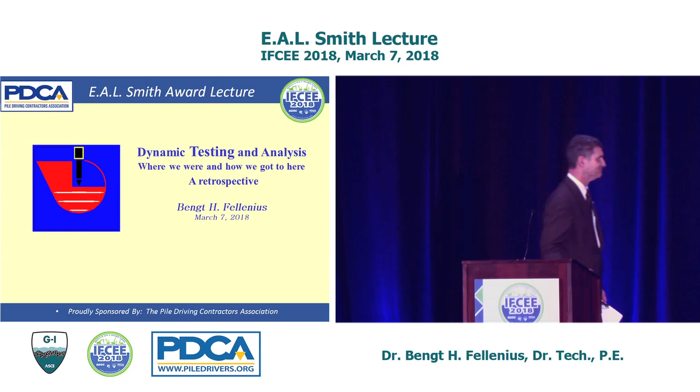Okay. Thank you, David, for saving me time. It's a pleasure to be here.

Indirectly, Ed Smith has, for me and for many of you, really had a great influence on your professional career. So it's a pleasure for me to present this lecture.

This is the bearing graph. We've known this for more than a century now. That's the capacity, however defined, versus the driving effort, the blow count, blows per foot, inch, or whatever, and we have a curve like this. This has been known for more than 100 years. The main message here is the diminishing return. When you come here and you continue, it just flattens out. Whatever the increase of resistance is, we gain nothing.

And that is, depending on pile, soil, etc., about 8 to 10 blows to the inch. You rarely gain anything with driving beyond 200 blows to the foot. That's been known, it's staple information that we have. This was formalized into a simple mathematical relation in a number of various formulas, putting mathematics into it.

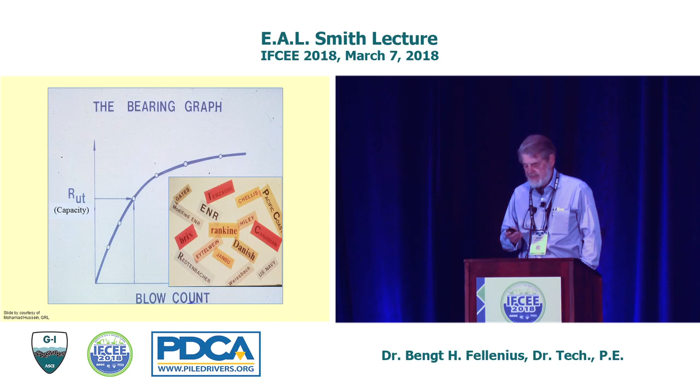Well, we move forward another three-quarters of a century. We're into the early 70s. And we're at the site where we have standard penetration tests, two of them, with silty sand going into a clayey silt. And we're installing H-piles, a group of piles, 23 piles I think, to be taken down to a predetermined depth of 85 feet.

This is the average penetration resistance as the pile goes down. Those are the maximum values every foot. That's the least.

This is actually the contractor, when he got down to here, and he had difficulty getting the piles down further, so he increased the height of fall of the hammer to 10, 15 feet. Now he managed to get the piles down, and the pile tip presumably to the estimated contracted tip.

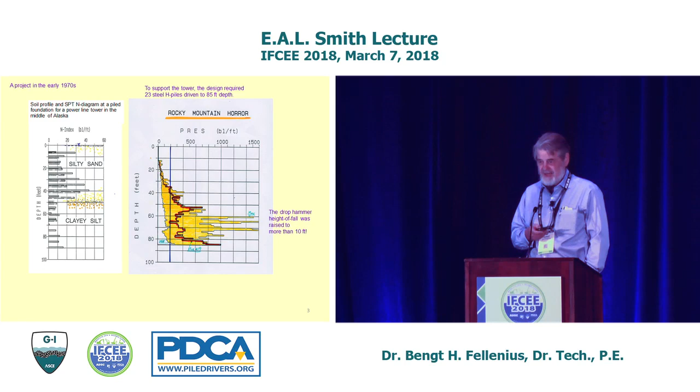This is another case where they do know where the pile toe went. It's here, at the front view. The pile went up there. The car was there before the piles. It happens. We have a similar situation in the other case.

And of course, it was subject to a lawsuit, and as fairness has it, what was discovered was that his survey crew, when they were to drill the site, it was flooded beyond the knees, so the boots wouldn't protect them, so they drilled at the edge of the water. At the real site, there was bedrock at 40 feet.

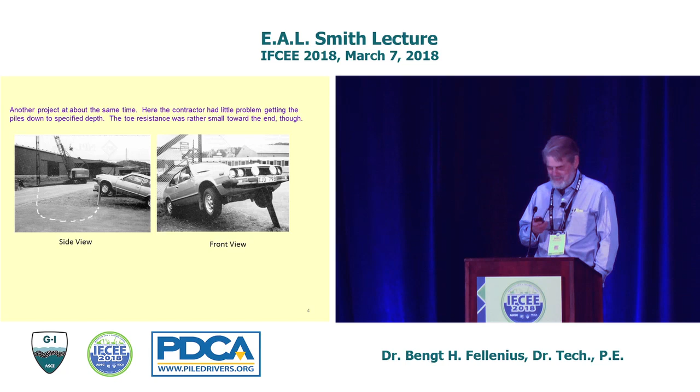Well, that was in the mid-70s.

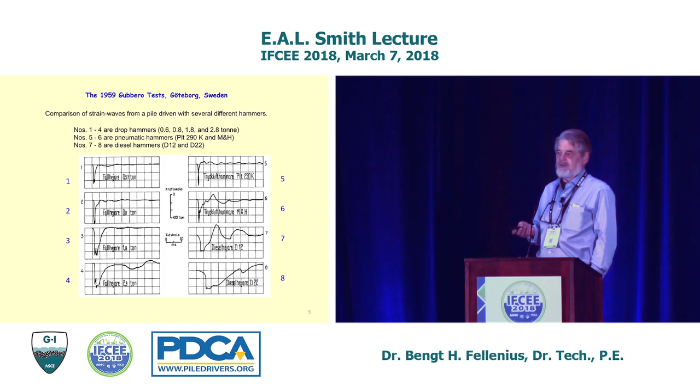Now we go back another 20 years. From first to my own experience, the first one was my own experience too, but on the side, so to speak. Here I am, a graduate student at the university, undergraduate actually, doing the first dynamic test ever on piles, 1959.

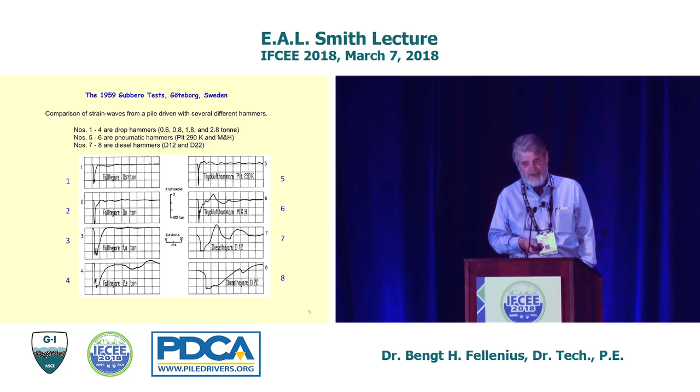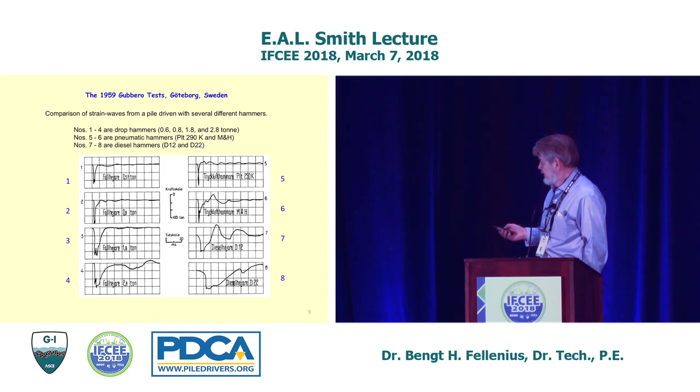And these are the curves. Now you're used to seeing them differently. I will shift them, and you can see this is force versus time, where you normally see it. You have a drop hammer here, a light hammer there, and a heavy one there.

You can actually see that with the light hammer, you have a narrow peak going up, and essentially nothing much happens after that. With a heavy hammer, you have a larger area underneath the curve, and you can actually see a reflection when the wave is coming up from the toe.

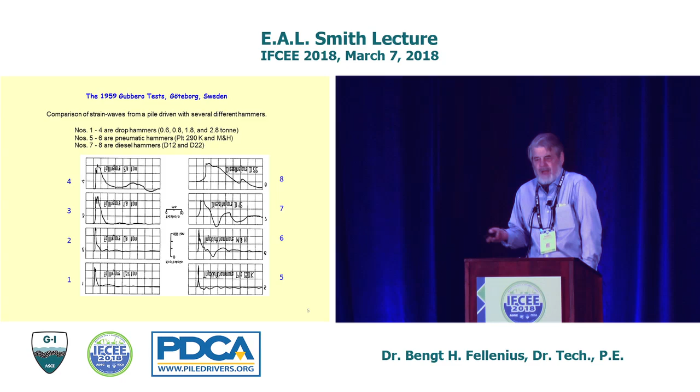And for the first time, despite having a light hammer and one about 4 or 5 times heavier, the force is about the same. That can be understood when you look at the wave equation analysis and so on today. We know this, that's what it comes out to.

But in '59, well, there was some understanding of dynamics and waves around, and the man in charge of this was Dr. Hans Christian Fischer at Uppsala University in Sweden. He probably knew. Nobody else did, and least of all the summer student.

Amazing, you see the hammer, and you look at the result, and the force is about the same. But the action duration, therefore the length of the force, is longer. And that's the basic information on pile dynamics.

Moreover, here's the diesel hammer, and we could see the pre-compression before the ignition. That's the first time ever that's discovered. It's known that there's got to be pre-compression, but in 2 or 3 hundredths of a second, you can't see it until you have measurements, and these are the first measurements.

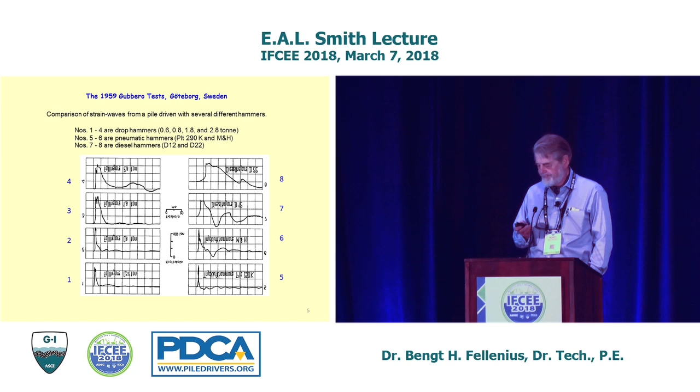How the measurements were made: we had an oscilloscope, and a camera snapped the picture. And then you traced that picture and got the wave traces. That's what they have summer students for.

Again, fairly simple, obvious observations, but I remember the excitement of seeing for the first time that we have a wave speed in a pile.

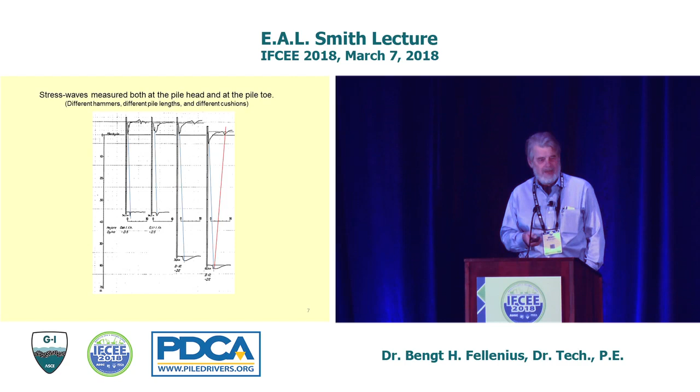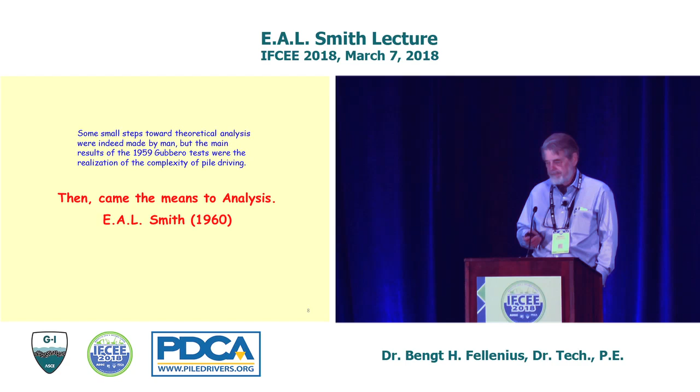These were small steps, initial steps made by man, but the excitement was about as big for some of us as the later first step on the moon, about 10 years later. And this is the beginning of pile dynamics.

Shortly after '59 came Ed Smith's first paper, a pioneering paper in the ASCE journal that started it all, transferring pile driving to a model of hammer, helmet, pile and soil into a wave equation model of elements that can be handled by a computer.

Ed Smith did not, as David said, work with the wave equation. He invented the wave equation analysis, the first one doing it. And you know what? The very first wave equation analysis was not done by computer, but it was done by Ed Smith on a Saturday, Sunday.

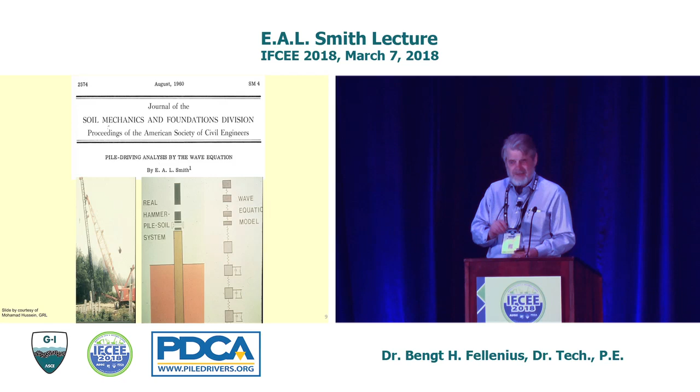He took every engineer, every accountant, everyone he could hold in the Raymond Company and put a series of tables along, each one becoming a pile element. Then he, I suppose, was the hammer, and said the velocity and mass he has impacting that table, and they took it and did the calculation he provided and passed it on to the next table, and they took it and passed it to the next.

And of course there is a reflection, so on the opposite side of the table were the reflective people, and they sent up the wave, just like the computer does. By the end of Saturday or end of Sunday, I don't know, he had one blow analyzed.

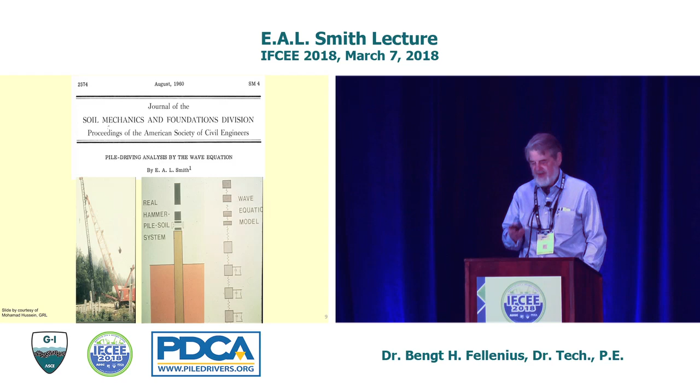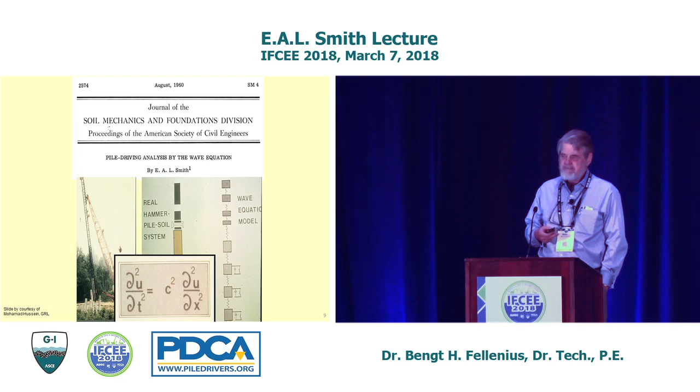And of course, when you read it without the detailed knowledge, you're a little bit confused, and you translate that into 'I don't understand it, so the statement must be profound.' Often it is not.

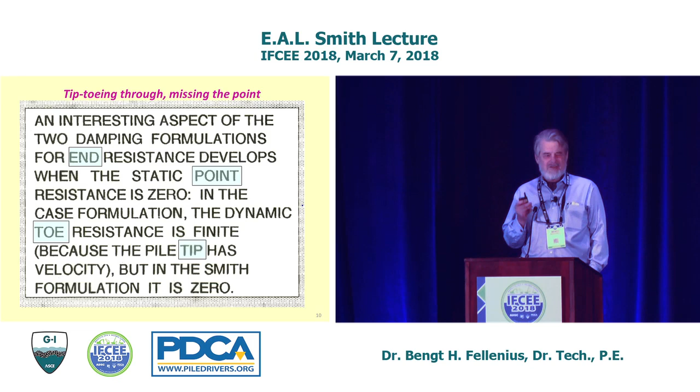The original wave equation by Ed Smith was made into a mainframe program, and eventually with the latest development, the ultimate development is the GRL WEAP.

Initially it was in public domain, and I remember getting the first wave equation program back around 1976, and you got it in a box with punch cards.

You have to take it to the important man in the company who was handling the mainframe inside a temperature-controlled room. He had a white coat, and you were very polite and gave it to him.

Now, I bought it early. I wasn't amongst the first ones getting it, but I got it early. But I have one record: I'm the only one who got it twice in the same week and paid for it both times.

Because when I passed it on, the man took it and walked to the computer, and it tripped. And you just don't try to resort the cards—you buy a new shoebox.

The key aspect here, you enter everything you need, but the key aspect is really the cushion of the hammer and the pile cushions. You can look at the modulus of elasticity and COR, coefficient of restitution, which is essentially a different slope when you're loading up and loading down.

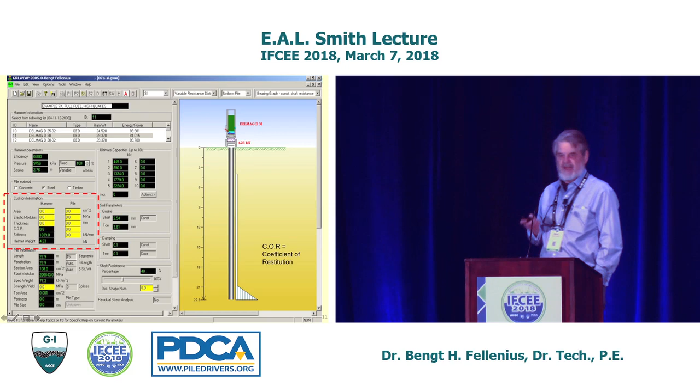Hysteresis, if you want. Now this is a hammer cushion, it sits up here for those hammers who have a hammer cushion. Aluminum to lead off heat, and a softening material, in this case rubber.

And the next one of importance is the pile cushion, usually wood, plywood in this case. And when you compress it and it's uncompressed back and forth, you generate heat.

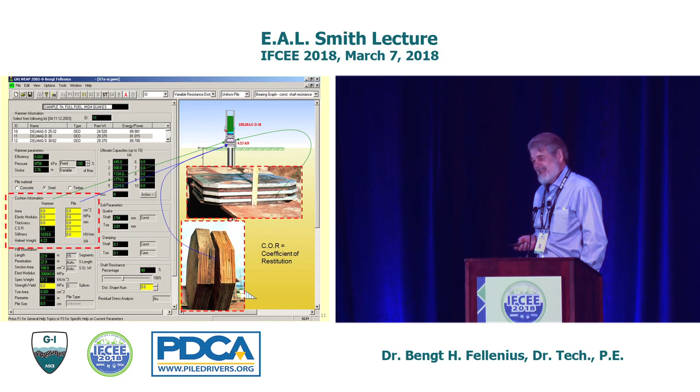And you really compress—that's wood before it has been driven. That is when it has had a couple of hundred blows. Modulus of elasticity is a function of the strength and composition, hardness if you want, of the wood and its thickness.

There's quite a different modulus between the original and that. And which one do we put into the wave equation to predict the stresses in our pile? That's always a question.

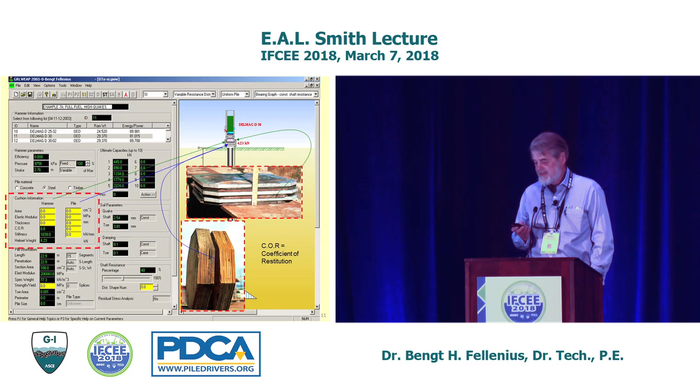And of course, the other thing is what happens in the real field: heat is generated, and you can have this. The pile should have been stopped and given a new cushion before this happened, because if you look at it, the coefficient of restitution becomes meaningless. This is beyond restitution.

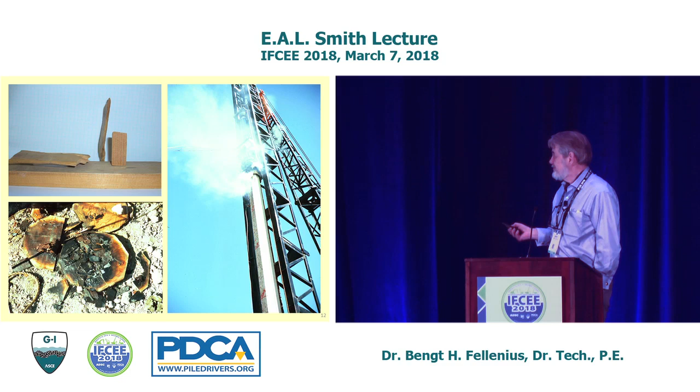Along with the WEAP came the pile driving analyzer, simply taking measurements of strain and acceleration and manipulating them in the pile driving analyzer. That's the pile driving analyzer of 1977.

It's the third one that PDI or Pile Dynamics then sold, and I was the third consulting engineer getting it, and starting to figure out what kind of an animal I had there, wondering if it would bite you or how you should treat it.

You have a tape recorder to save the records, the analyzer which has a paper tape to get the records, and if you want to see the traces, you have an oscilloscope. You don't need to take photographs of it anymore, but it's there. And it's quite a hefty thing - you need two people to travel with it, and you have to give it its own seat on the airplane because it's too sensitive to be shipped.

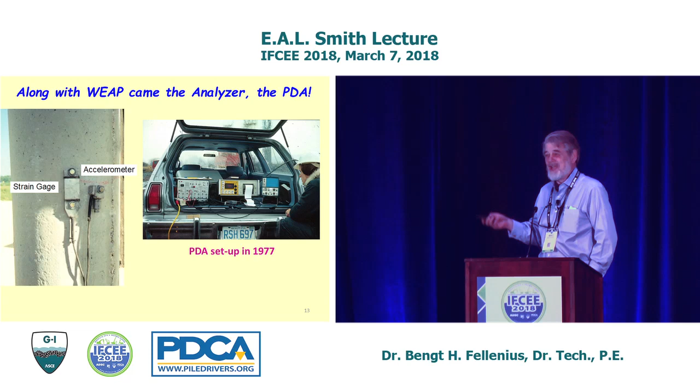And what do we measure? It is the force, of course, from the strain gauges. Now it so happens that we could measure the same thing with an accelerometer, because if you measure the acceleration and multiply it with the impedance, a material constant actually, you get force.

The fantastic thing was that the people developing this, George Goble and co-workers, used both measurements independent of each other to measure the same thing. You have force here, whether it's measured by accelerometer or strain gauge, the same value. So why double up?

Well, it is the strange thing that if you have a reflection from the soil, force increases in proportion to the strength of that reflection. So force increases, but the pile slows down, so the physical velocity is less, and the two curves separate. One of the great things that happened here with George Goble and his co-workers is to recognize this: that the separation is a graphic picture of the magnitude of resistance, capacity at one depth if you want, and that this can be used.

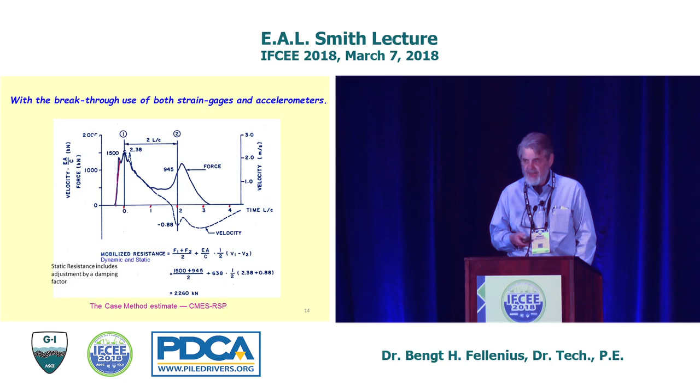And this is the beginning of the practical use of dynamics in foundation engineering.

And other co-workers in this team developing what we now call the pile driving analyzer work.

I'm going to show a couple of slides, very simple things, but they were revelations to me at the time, because I had never seen it before. I knew, for instance, about setup and the increase of capacity with time.

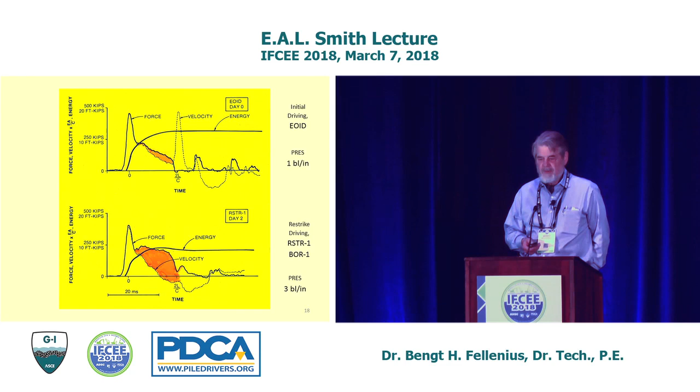So he couldn't meet his contractual obligation to drive these piles down. And the owner said, hey, your hammer isn't working anymore, you got to get a new hammer. And of course, that caused delay and tremendous cost to get it out there. And the contractor said, no, my hammer is working fine. It's changed soil conditions, I will now have to drill through and then drive again. That will double the price or whatever.

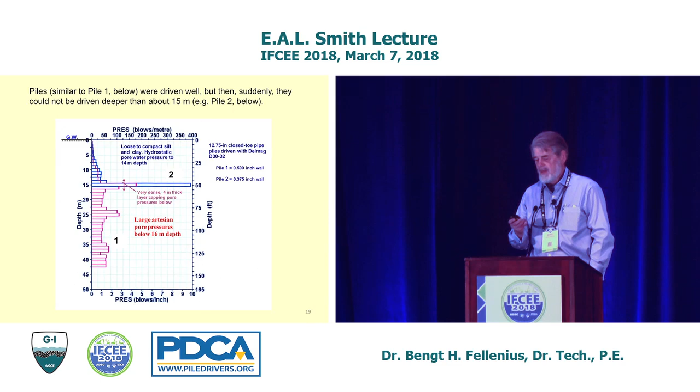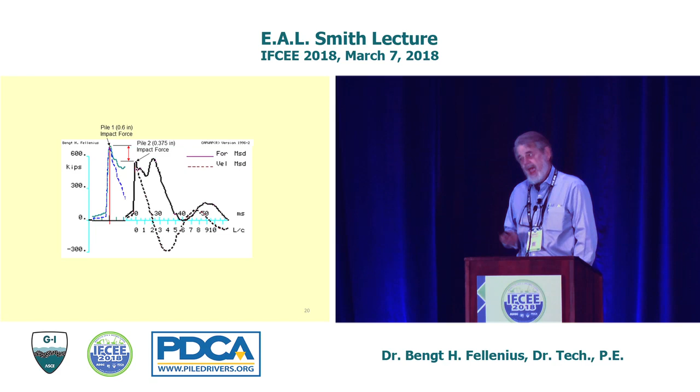So of course, the contractor stopped asking about claiming changed conditions. The owner pulled off the thinner pipes and brought the heavier ones in, and the contractor and owner were great buddies and friends again, and the lawyers went home and cried.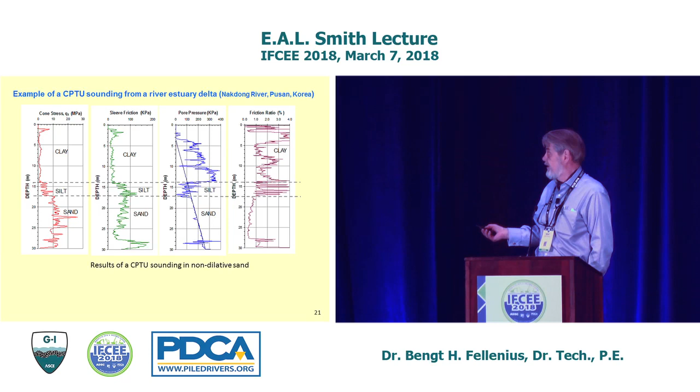At the same site, intermittently over a site, it was a large pile driving site for a city, actually, and now this is the pore pressure. It dips, doesn't become negative, but it almost disappears. That is, the soil is dilating when the cone is pushing. And when it dilates and pore pressure dips, it becomes denser, and therefore the stresses double and treble the cone stress. That means that the pile is even more so displacing sand that dilates, and resistance goes up.

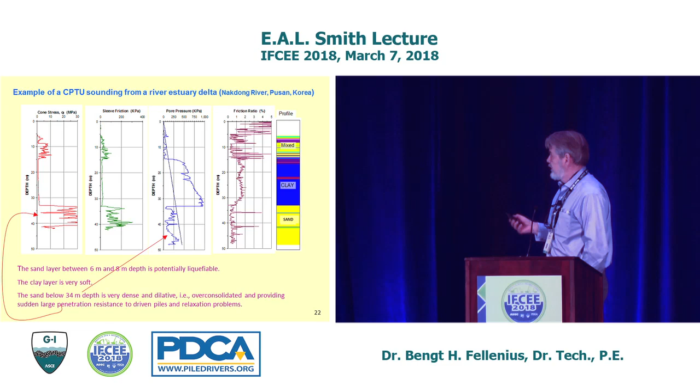The cylinder part, so it was plumbed inside, and at that particular depth, about here, whether we drove down there or started there, the bottom of the pile was still at the same depth. What happened is the pile broke, and after the last blow, funnily enough, the broken up pile and soil went up into the inside of the cylinder, and the pile sank. And as we continued to drive, we're just crushing concrete down there.

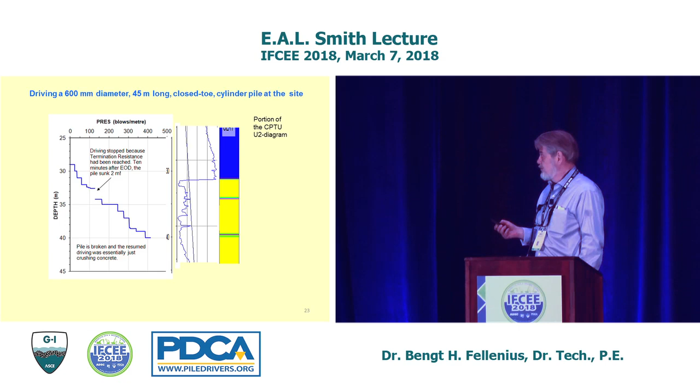And now, that's a speculation, but we do have the measurements. This is the measurement at the last blow. You have a little bit of shaft resistance and a good toe resistance coming here. You can see the wave up curve there too. Three blows later, we're now talking the first blow when we start driving again.

This is the impact force, and no resistance, and just no toe response at all. If you look at the wave up differences here, it's a significant difference. So the dynamic measurements confirmed the speculative opinion about what had happened.

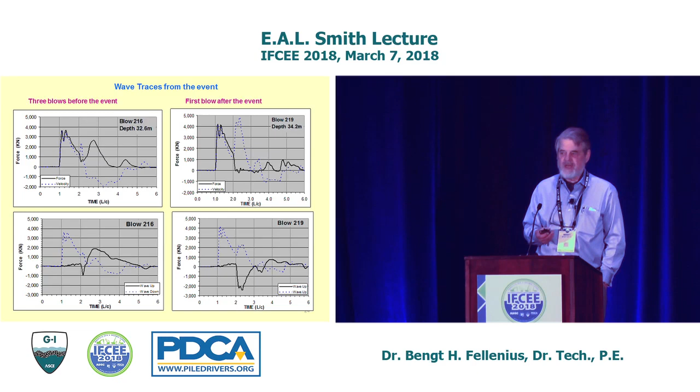The solution to this problem was to use a cone and find out the zones that had this dilative response, and drive down to it very carefully, then take a while to drive through that layer, a couple of meters thickness, to succeed with the project. Combining and verifying this with occasional dynamic measurement, you're putting the soil exploration and the dynamics together to reach the successful end of the project.

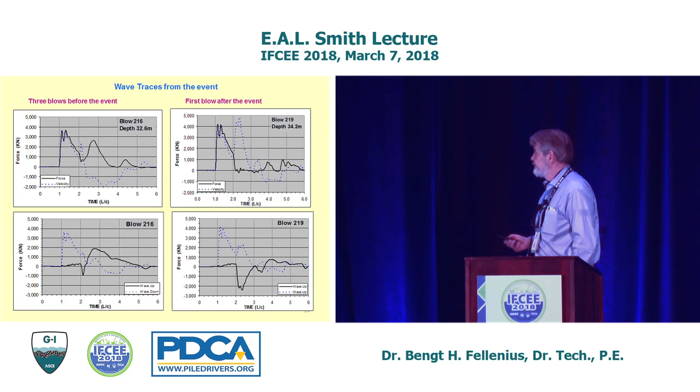Now, can't talk dynamic measurement without coming into CAPWAP. That is the analysis of the test data. Just to remind those who aren't familiar with it, we have two measurements: acceleration and strain. CAPWAP means taking one measurement and letting the computer run a wave equation analysis, called CAPWAP analysis, to calculate the input is what the soil is and everything. The input from the hammer is the measurement, and the computer calculates the other measurement that is not touched - that's independent.

You take the acceleration velocity measurement and calculate - the computer wave equation analysis calculates what the other measurement should be. Now, when you do that, if the other measurements calculated and the actual untouched measurements, as in this case force measured and force calculated, fit right on top of one another...

Pat Hannigan, who did this, really went into the cosmetics here. It's a beautiful match, and of course the velocity match will be the same. Now we have, with the CAPWAP, back calculated the actual soil response, dynamic and static, and we're looking for the static so we can tell what the shaft resistance is and what the toe resistance is. That's what CAPWAP does.

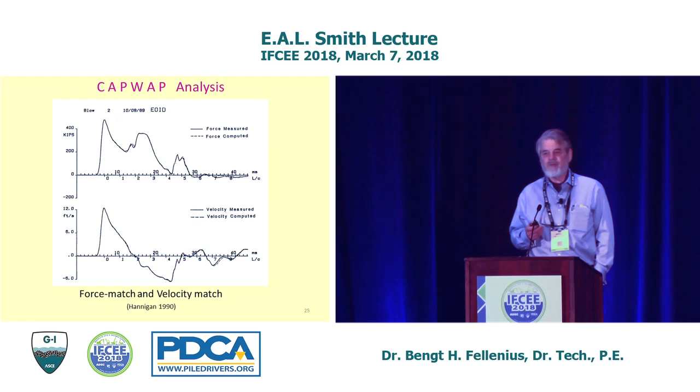And the process is, again, Pat Hannigan's work - you start out with a set, you don't get a match, you improve on it, you improve further. This is fine, you have to improve that, that's the cosmetic work, and you finally get a match.

Some of this can now be done by a computer by itself, unaided. Of course, you need the judgment of an engineer around there. I've seen some terrible computer simulations believed to be the real thing. You always need a good, experienced fellow to improve on the robot.

This was all new back in the 70s and into the 80s. At that time, I was wondering - I had a fellow who was very capable in doing CAPWAPs. I never really got the hang of it. I could do a decent one with the old ones, but I couldn't do it today. I don't trust computers - I wouldn't like the computer to do it. But you have people around you that are very knowledgeable and capable on this.

But back in the mid-1980s, you'd ask, how true is the CAPWAP analysis to the results of a static loading test? So I took a couple of records and sent them out to every person in the world who was doing CAPWAP analysis - all 18 of them. Two of them were Garland Likens and Frank Rausche, one or the other, I don't know which.

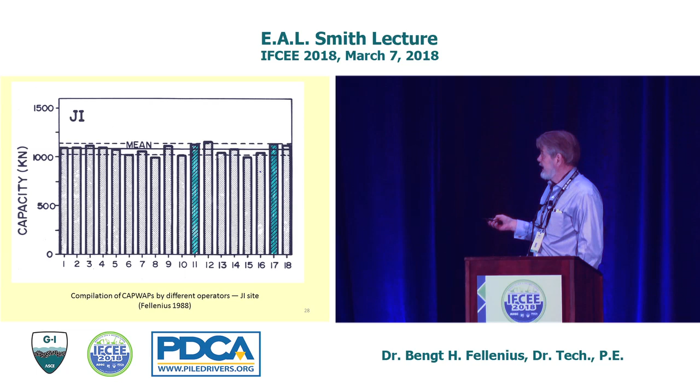Here's another one from Jones Island in Milwaukee - another case, even closer together. No static test there on this particular pile. That was encouraging - I'd like to see if I could repeat it today. I'd be willing to do it, but we're talking about 1,000 people or more, I guess. I have no idea how many, but it's everywhere, and they're not all trained by Frank and Garland either.

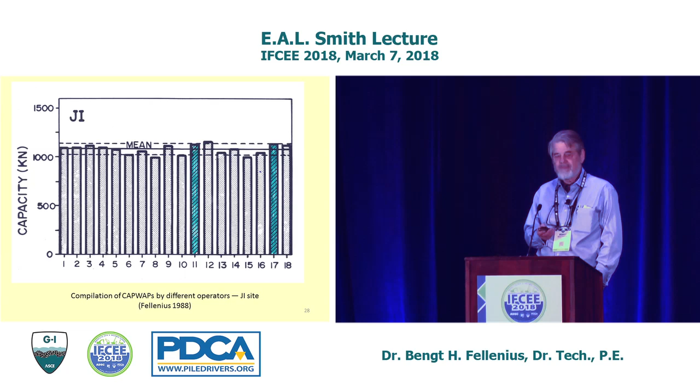When we're happy and appreciating the agreement between all of these and look at details, you see that the toe resistance doesn't have the same narrow band here. There's a matter of some compensating, not errors, but input assumptions. If you're off here, it's corrected subconsciously up here, whatever. It is a very proven, very reliable method for finding out the key question: what is the response of a pile to a load?

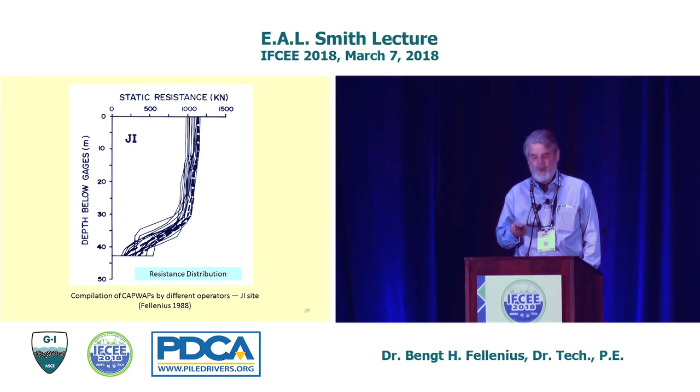Along the road there was a discovery. Ed Smith assumed that the movement necessary for a pile to generate full resistance was 1/10 of an inch, and that's what was built into the first version of the CAPWAP. Frank Rausche, on a project that I happened to work with, had to come in and do a complicated CAPWAP.

We have force, velocity. There's quite a bit of a soft toe response, and that is at 3 meter, 11 meter, and 12 meter depth. And when we look at it at the more shallow depth, you can't make a match at the 1/10 of an inch, 2.5 millimeter. So Frank realized that, never mind what Ed Smith said, quake is not always 2.5 millimeter, and he could make a match here at, I believe it's 20 millimeter.

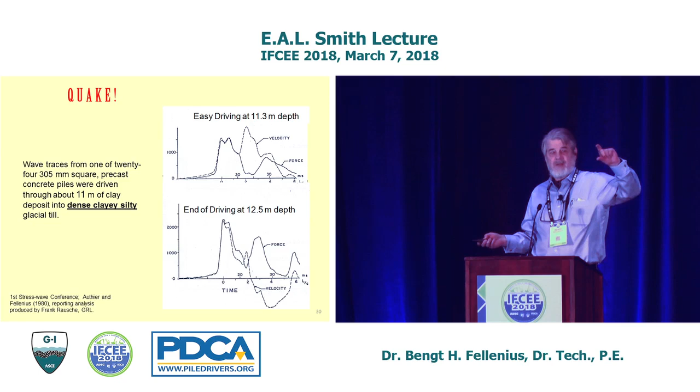That much, and the same thing for the later on. They can't make a match with 1/10 of an inch, but you make it with a different one, and it's not the same as the earlier. We have to recognize that the distance the pile has to move is a function of the soil response, the grain structure, and the number of items, particularly when you're dealing with silty fine sand soils.

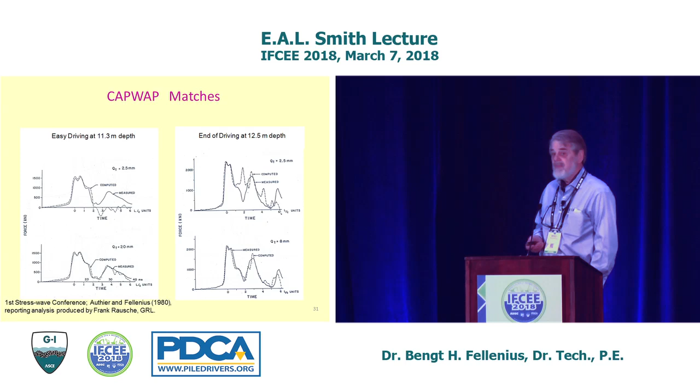It's one of the improvements and developments along the way till today. And it's important, because if we have a conventional pile driven at the low quake, we have a bearing graph like this. If at the large quake, it's a bearing graph like that, and that's the capacity. It can have a significant difference, and you do not get a soils investigation report that tells you what the quake of the soil is. That comes with local experience for the site.

That's why in any foundation engineering, and particularly in pile foundation engineering, you need to have local experience, past experience. I found that often it is the local engineer or the foreman in the field who knows more of what the pile will do than you can ever do with a dynamics analysis. But measurements, taken and properly analyzed, can lead you right.

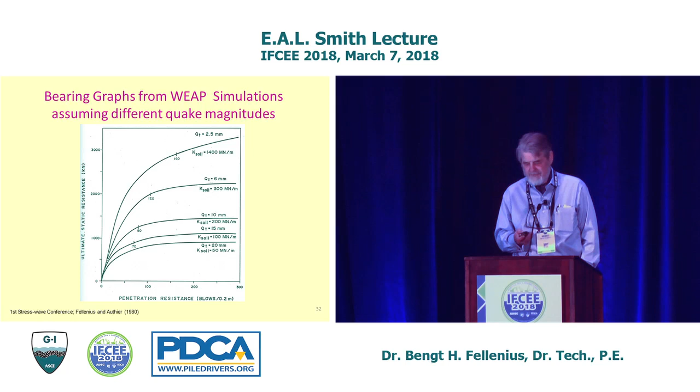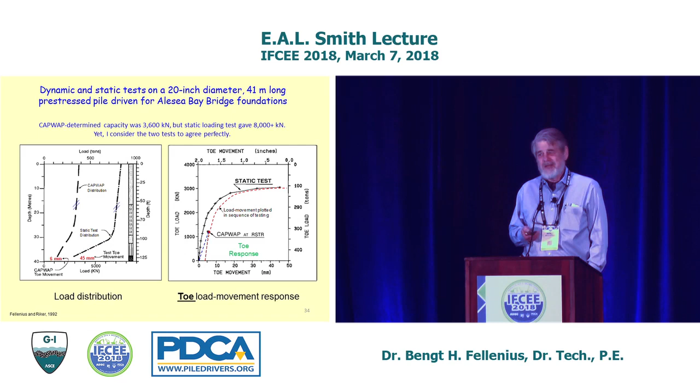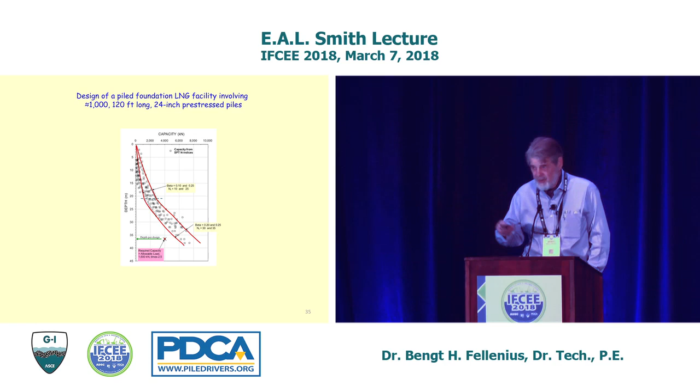Another case, speed up. This is prediction of capacity using standard penetration test and a large prediction. The engineers look at this and say, yeah, we need that as an ultimate, 2.5 times the working load. We better play it safe and put it down there in case we have overestimated capacity. Now what happens when the contractor gets the job? He knows that he's going to, in this case, drive to 1,600 kilonewton. He's not going to bring in the cost of a hammer and equipment to drive to 2,000 or 3,000 kilonewton. He knows what he's going to drive to.

Now turned out he couldn't reach that. These are actually CAPWAP analyses at initial driving. Even at the keep driving at 100 blows to the foot, he couldn't reach the minimum tip, because the soil wasn't as weak as the engineers in that conservative approach thought. They erred on weak soil. The contractor meets the real soil. If he wants to err, he should err on strong soil, not on weak. So that's an incompatibility between the designers and the contractors in this case.

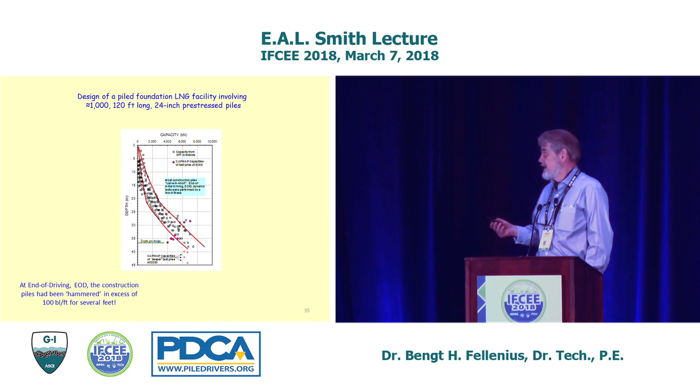At this site, here we stop a pile and then start driving again a couple of days later, and the blow count goes up. That's been set up. Then as we're driving, it drops, and now we're into denser soil. It happens most of the time, and when we have, as in this case, a dynamic doing a CAPWAP, you can see that's now the case—not CAPWAP, that's a case method estimate, a simpler method of getting a capacity, and you get it for every blow. You can see the resistance that this is driving against, and in restrike, you have this kind of resistance way above the working load and the presumed ultimate limit that you should have. They were driving the piles too deep. And of course, it was a costly remediation, litigation, and so on.

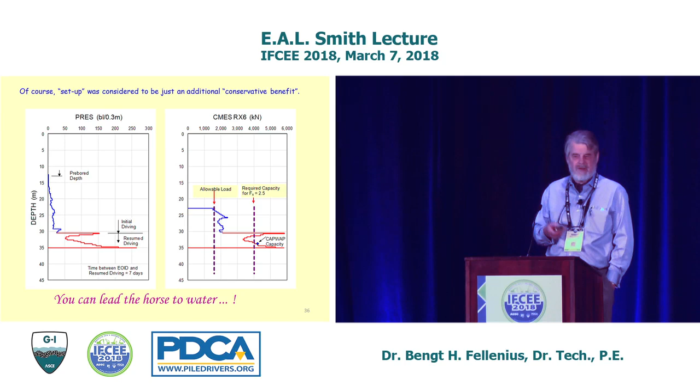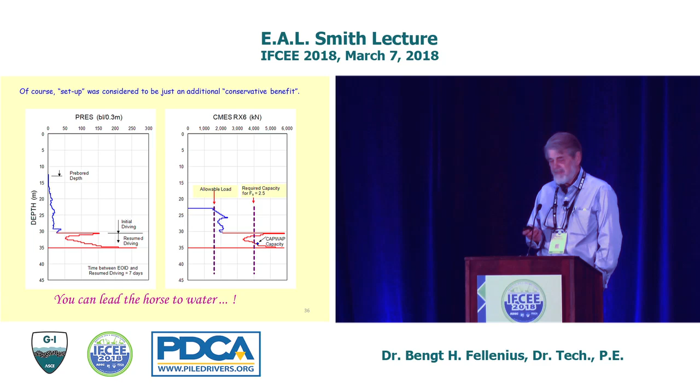If looking at the data and bringing in the measurements, soil and dynamic, we can avoid these things. But we have to look at it. In this case, they didn't want to look at the dynamics. They had the standard penetration test. That's good enough, they said. Excellent test, but it's not good enough.

And then along the way, we have a case where trying to sell them, instead of doing static tests, you should do a dynamic. The dynamic was made along with the static. The engineers looked at this and said, hey, this is our critical limit for the static. There's no correlation here. We're not going to do dynamic. But with a simple recognition of plotting the dynamic in the sequence, you have a very good agreement. Actually, if anything suspect here is that the agreement is too good. You have two different methods. They shouldn't be right on. But in this case, they probably are.

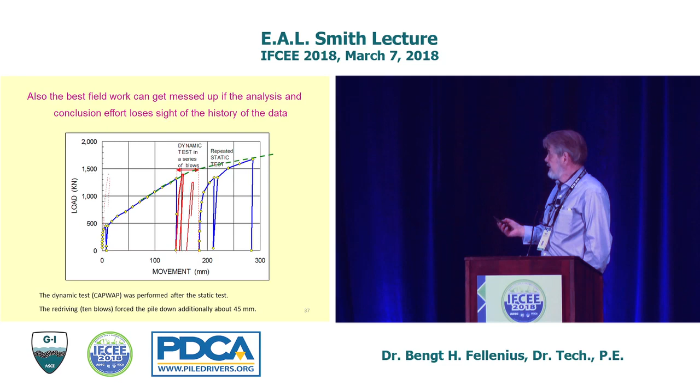You have a continued restrike and then a new static test. It's really part of the same test all through.

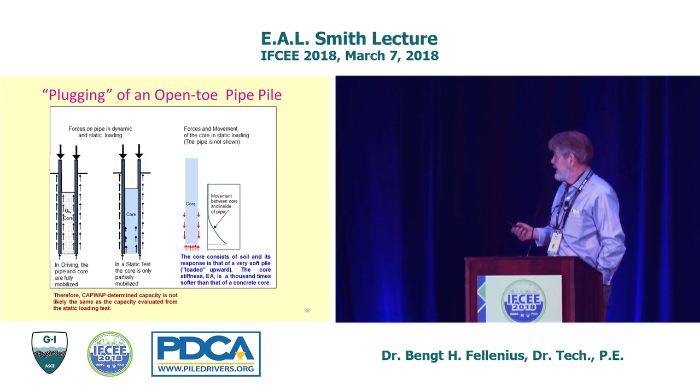We'll skip these. It's interesting what dynamics and static do in pipe piles, but I'm running out of time, so we have to remember a large number of other things.